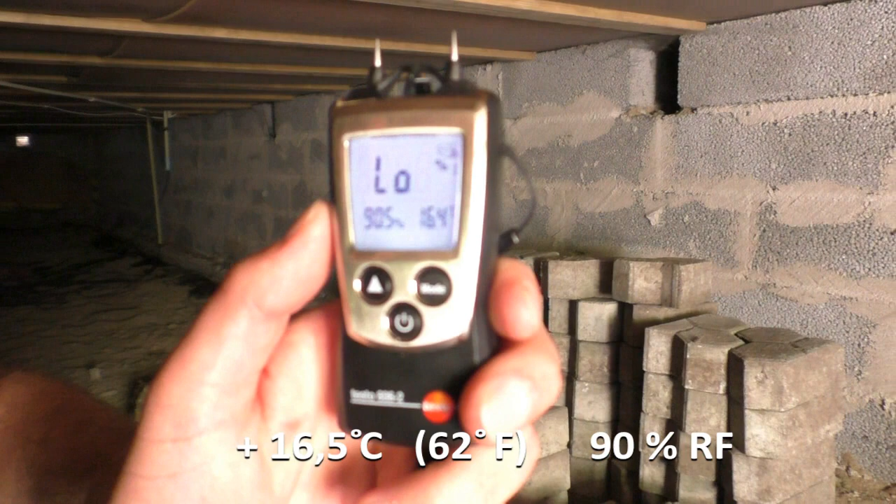Now we are down in the crawl space and we have left an air humidity measurement instrument here for a while. And now I can read on the display that it reads 16.5 degrees Celsius and a relative humidity of about 90%. The modern crawl space was introduced in Sweden in the 1950s and became a very popular foundation to build houses on. Almost every third house in Sweden is built on a crawl space, but it soon turned out that the crawl space had its problems with high moisture levels and mold.

Today the crawl space is considered a risk construction, but it does not necessarily mean that it is bad to have a house with a crawl space if you look after it frequently and if needed make changes in due time.

To easier understand what I'm going to explain to you about moisture in crawl spaces, I am now going to hand you over to myself at a flip chart.

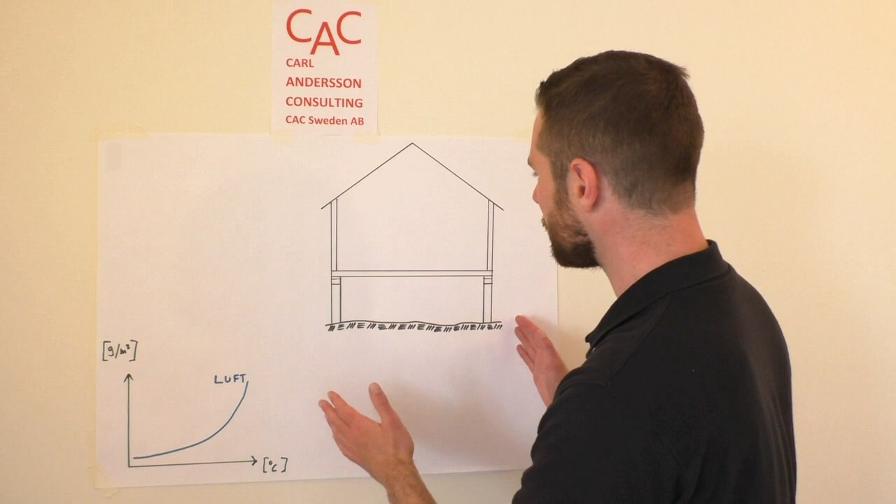Thank you, Calle. Now we are going to look at building physics to understand why the crawl space has problems with high moisture levels and mold. Here I have nicely drawn a house with a crawl space and I'm now going to explain this.

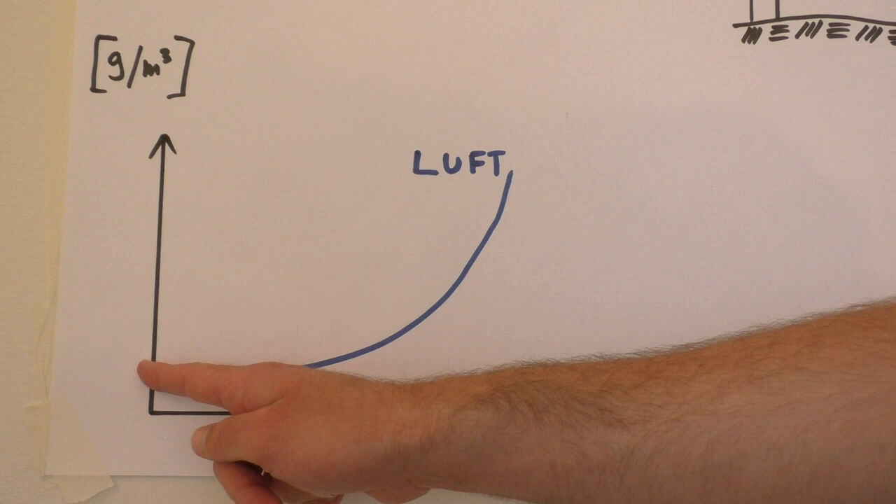The first thing we need to understand is that air can hold different amounts of water vapor depending on the temperature of the air. If we look at this graph, we have temperature on this axis and on the other axis we have grams of water per cubic meter of air. At a low temperature, the air can contain a little amount of water vapor. If we go to a higher temperature, the air can contain much more water vapor.

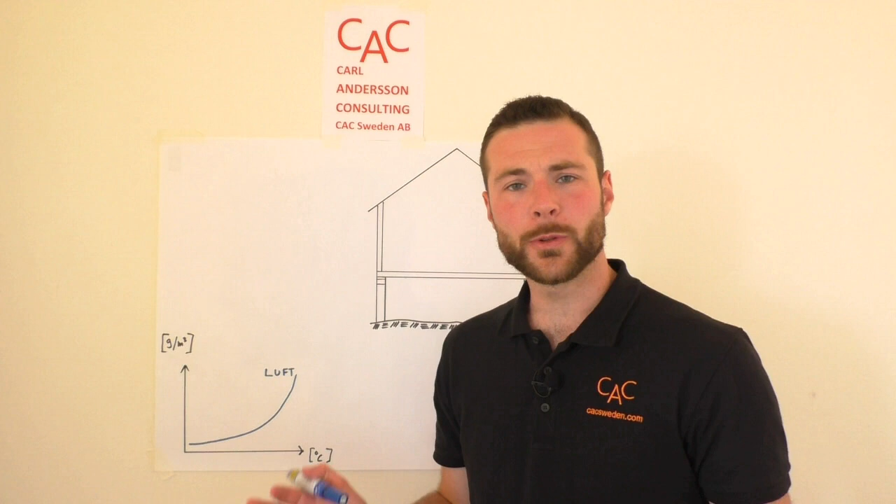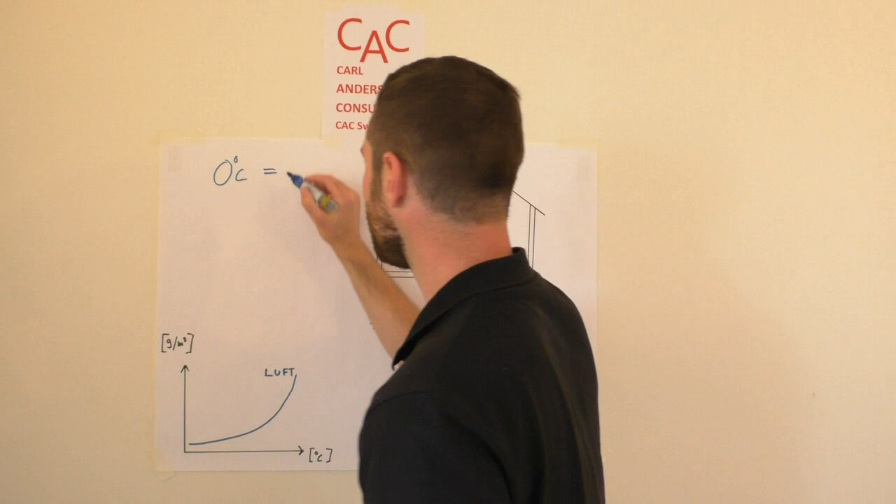Okay, great. Let's look at an example to understand this. Let's say the outside air in the winter is 0 degrees. The graph gives us that the air maximum can hold 5 grams of water per cubic meter of air.

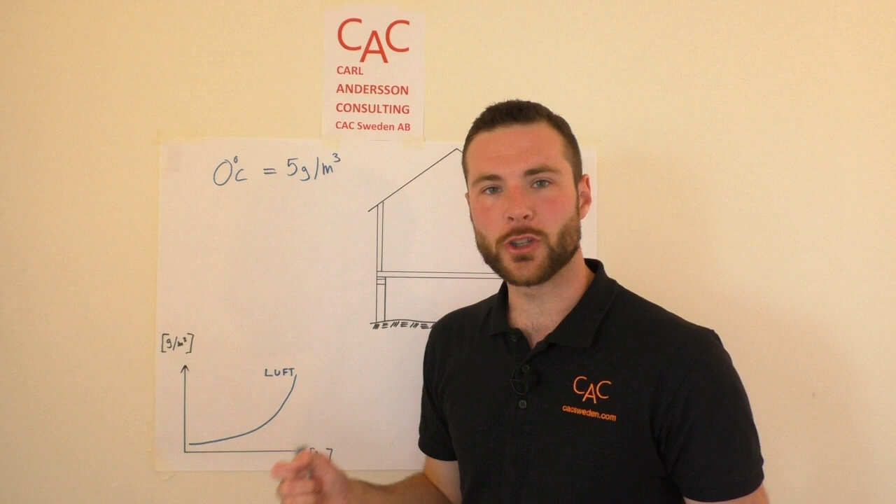Okay, now let's take summer instead. We measured earlier 28 degrees Celsius outside. At this temperature, the air can maximum hold 27 grams of water per cubic meter of air.

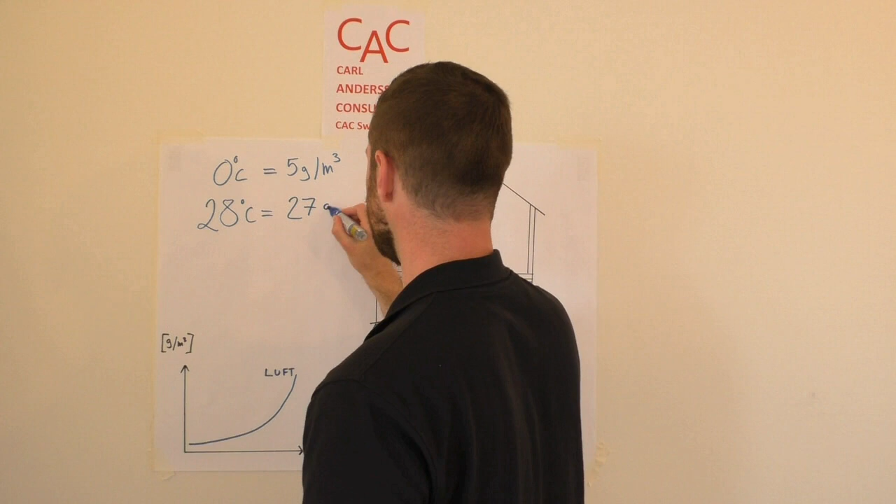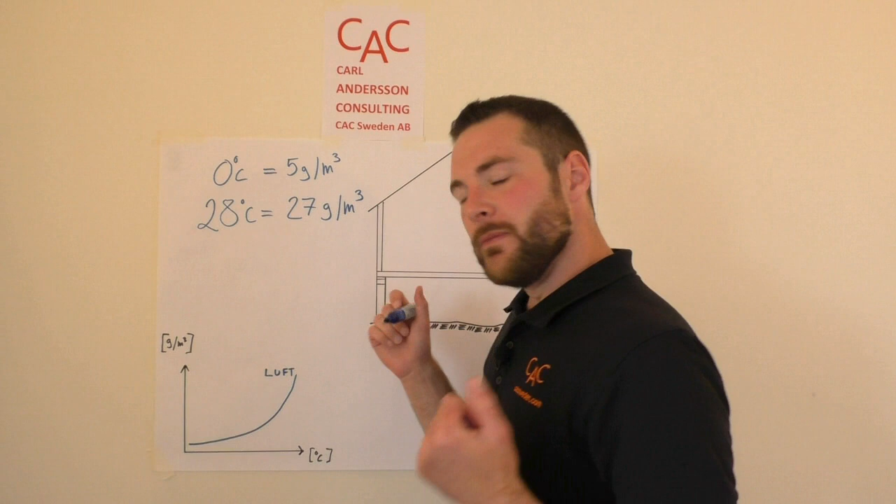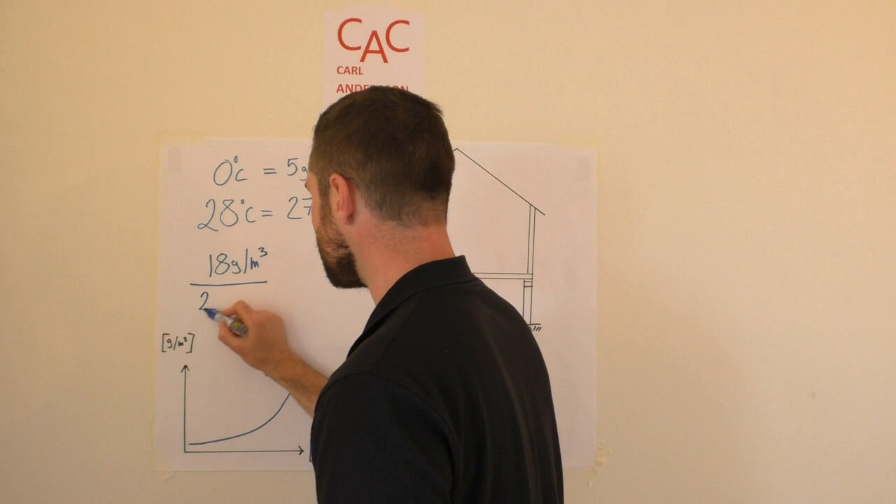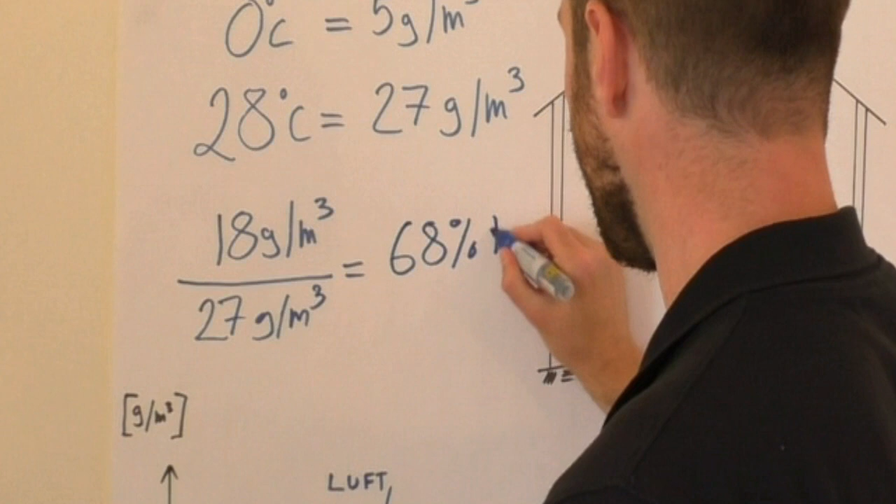But the air is not always saturated to its maximum 100%. Let's say we measure the actual water vapor content in the air on this summer day to be 18 grams of water per cubic meter of air. The temperature was 28 Celsius. Then we can divide the actual water vapor in the air with what the air maximum can hold at that temperature, which was 27 grams of water per cubic meter of air. This gives us a relative humidity of 68% on that summer day.

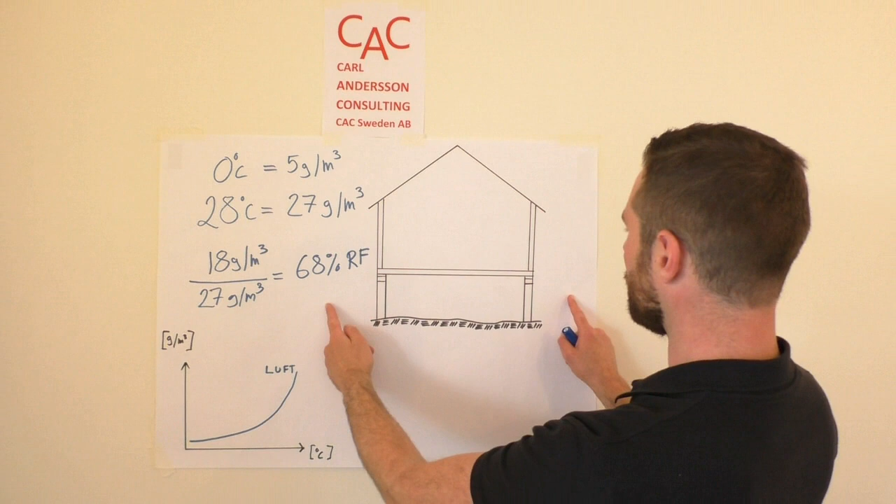Okay, but what about the crawl space? Let's get back to the issue. In the winter, the air outside is cold and dry. This cold air is ventilated down into the crawl space and cools the foundation, but also dries the crawl space. The foundation gets cold, but mostly the whole ground gets cooled off, which creates a big mass that will keep it cold for a long time.

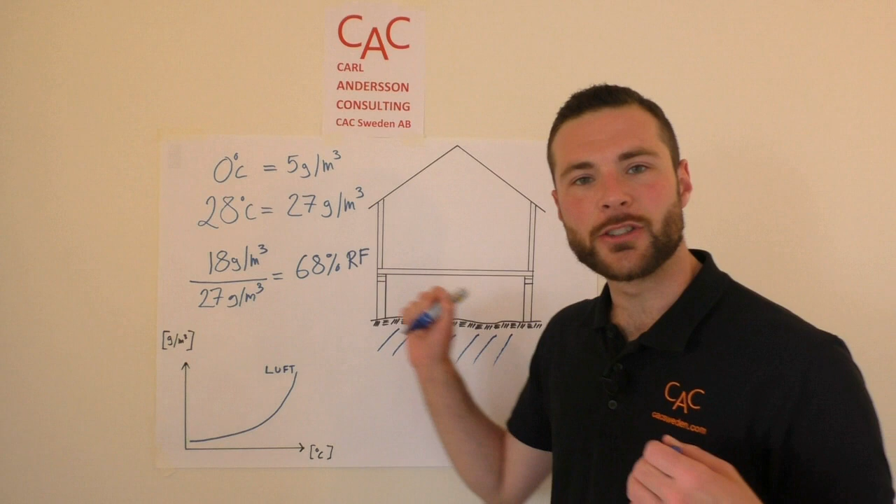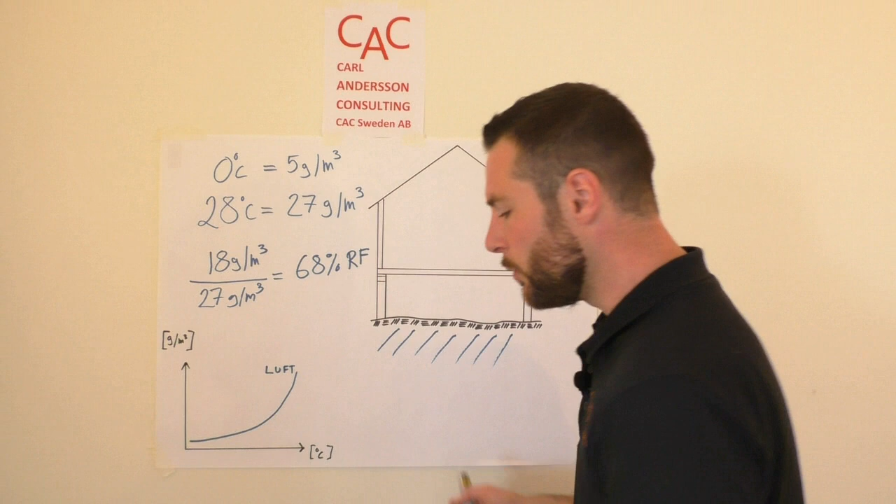And then the lovely Swedish summer arrives, the weather gets warmer again, the temperature rises, humidity rises, we start hanging by the pool again. Now this hotter and more humid summer air is being ventilated down into the crawl space. But the crawl space is still cold from the winter.

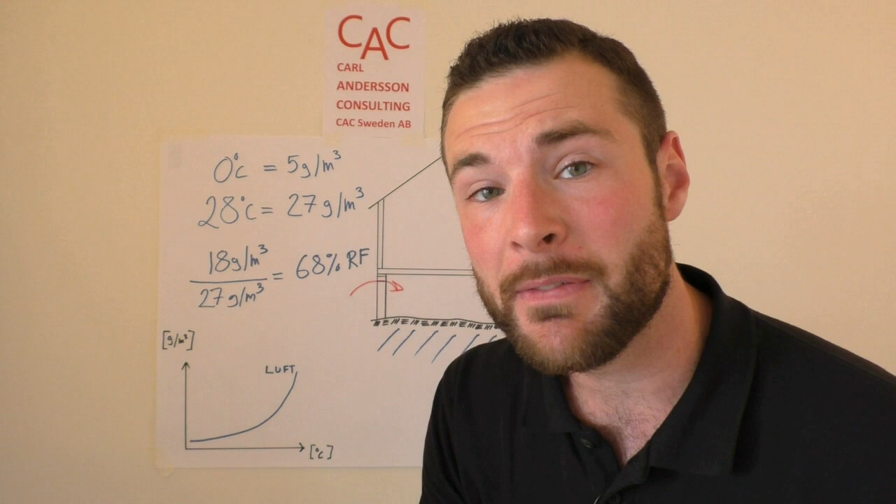You can actually feel this if you go down into the foundation in the summer. What do you say, Calle?

Yes, it's actually quite pleasant down here. It's cool and nice, but it also feels a bit damp.

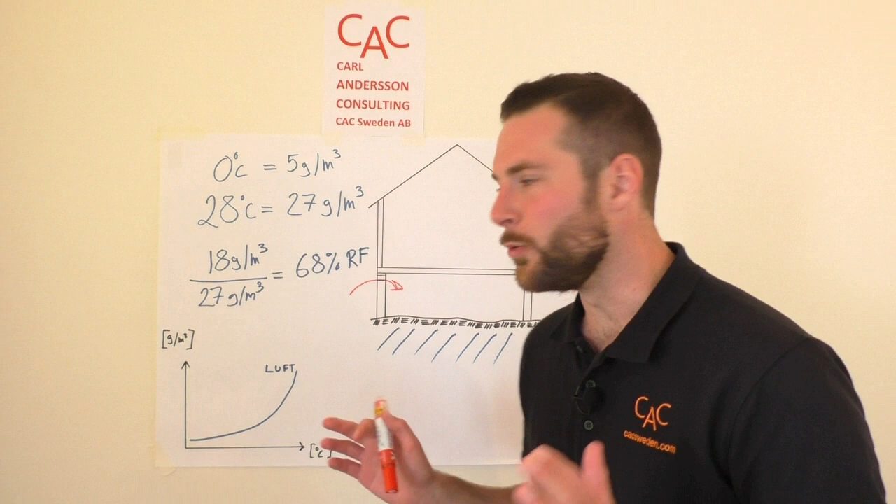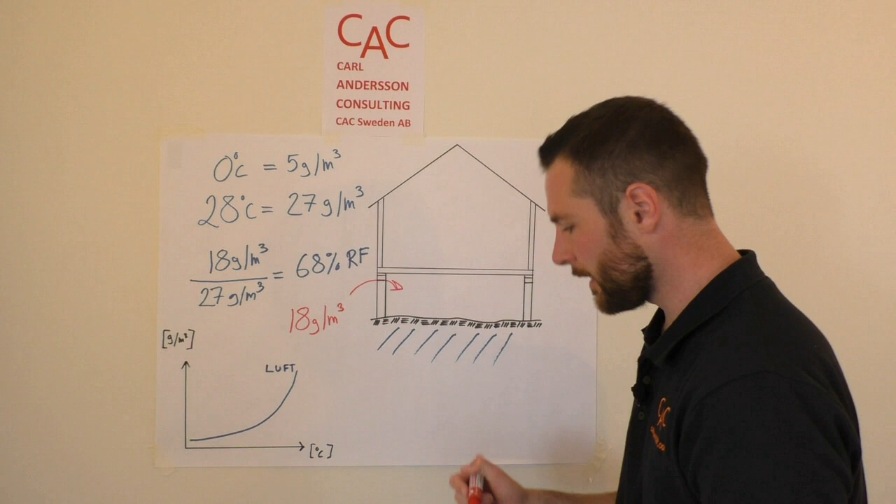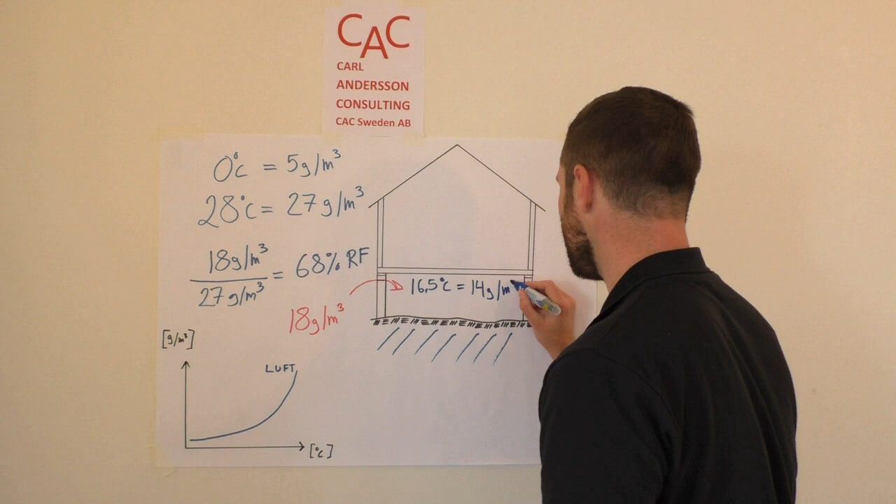Exactly! And now the hot humid summer air is going down into the crawl space with the 18 grams of water per cubic meter of air. The hot outside air goes into the foundation, and the foundation we had measured at 16.5 degrees Celsius, and at this temperature the air can maximum hold 14 grams of water vapor per cubic meter of air. So 18 grams per cubic meter is entering, but the crawl space can maximum hold 14. What happens then?

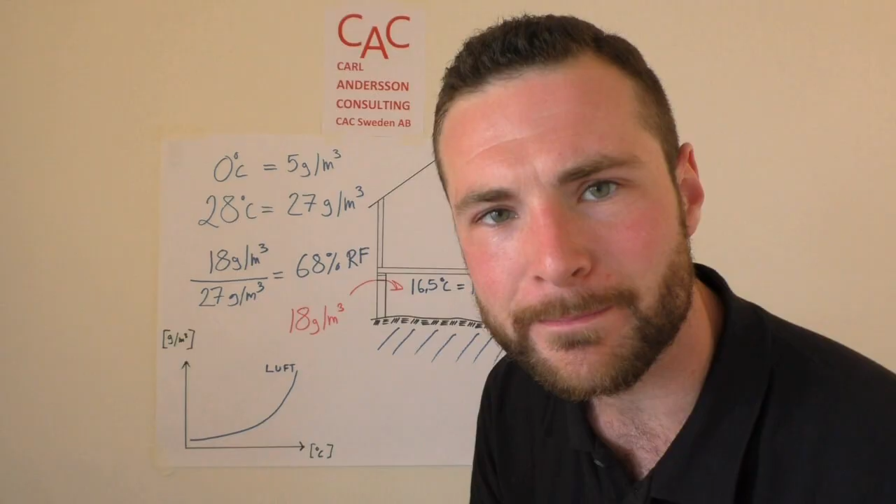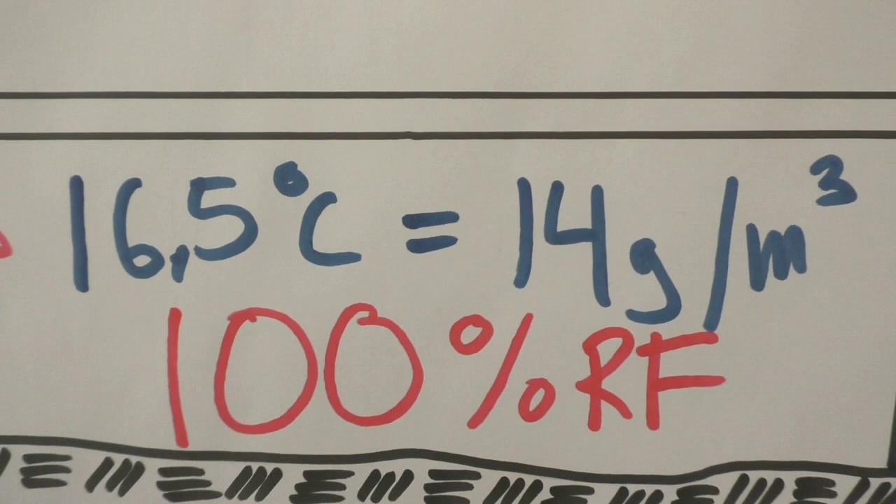Condensation. The relative humidity in the foundation now is 100%, and condensation is dripping and running in the crawl space. Note that the air can't be saturated above 100%. We ventilated 18 grams per cubic meter of air into the foundation, and the air in the foundation could maximum hold 14 grams per cubic meter. Everything between 14 and 18 becomes condensation.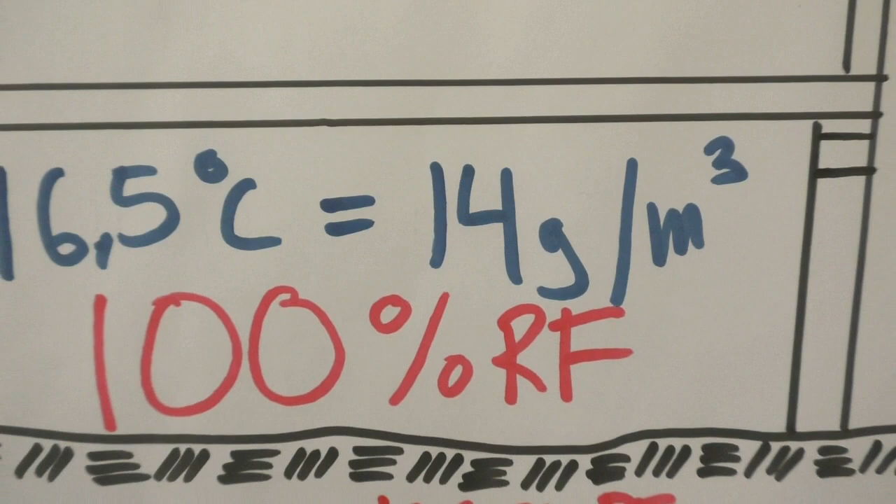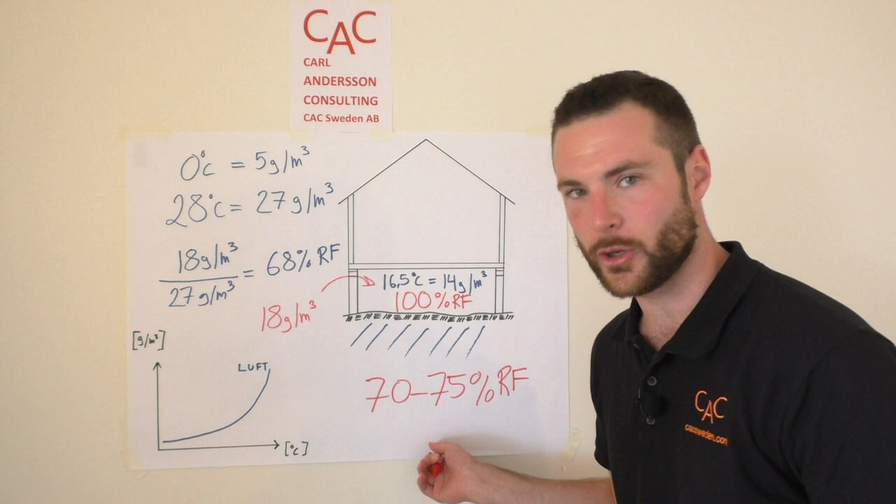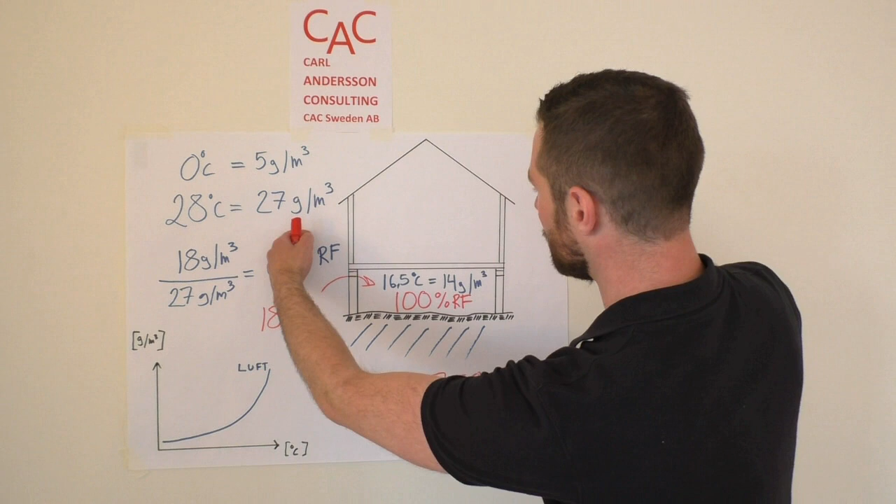Okay, so when is it risk for mold in the foundation? Well, typically we say the risk starts from about 70 to 75% relative humidity in the ground, which is normally during the summer. Also note that moisture is not only added via the outside air. Moisture could also come from the living space above, it could come from rainwater, or it could also naturally come from moisture from the ground.

If you have a house with a crawl space or are planning to buy a house with a crawl space, the first thing you should inspect is the foundation to see any signs of moisture damage. The second thing you should do is install a moisture measuring device to keep track of the relative humidity. Above 75% means there is a risk of damage. The latest research shows that it's almost impossible to fix a crawl space by just adding a plastic foil or insulation. The best thing is usually to install a professional dehumidifier.

Hope you've appreciated this film from CAC in Sweden, and don't forget to inspect your crawl space twice per year. And don't forget, the crawl space is not meant to be a storage area.